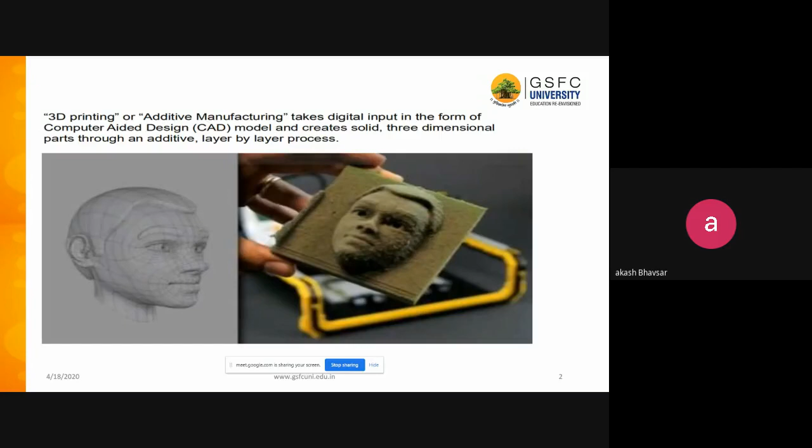So let's go and understand how it works. It's broadly classified into three steps. First is to create a 3D image of any component or item that you want to produce. In computer software, there are CAD softwares available which are very advanced, and they can create very complex shapes with them. So the first thing is to generate the component inside the computer.

Then the CAD information is sent to the printer. After that, the printer forms the item by depositing the material in layers, starting from the bottom layer onto the platform. In some cases, light and lasers are used to harden the material. So from the bottom it starts and goes till the top. There are 3D printers available for different sizes of elements, but broadly this is the process or workflow you need to follow to make a component using 3D printing.

Now let's go into a brief history. Charles Hull invented 3D printing, and he coined the term stereolithography at that time. At that point, the word '3D printing' was not popular, but he started it. Then in 1992, the first 3D printer was built by a company named 3D Systems.

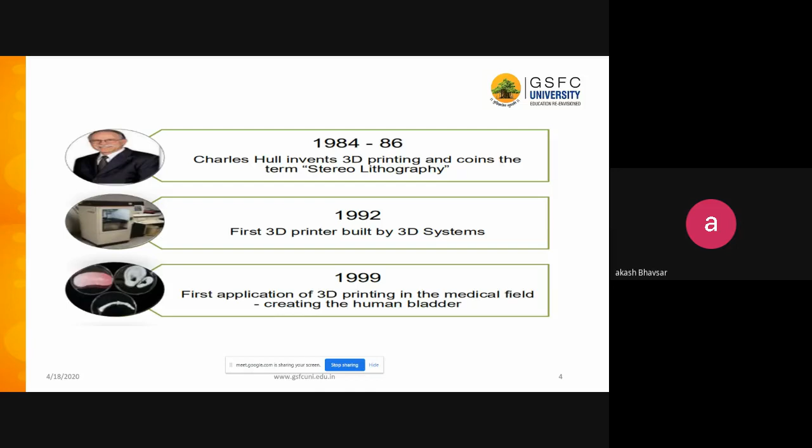Then in 1999, the first application of 3D printing in the medical field, creating a human bladder, right? So these are some of the points or milestones in the 3D printing technology, and how it got advanced at particular stages. And we will also discuss how it will evolve in future.

So in 2000, a human kidney was created through 3D printing. In 2006, printing of multiple materials got started, right? Then in 2009, a prosthetic leg was created, and in 2011 it started making jewelry, right? So these are some of the milestones in different industries in utilization of 3D printers.

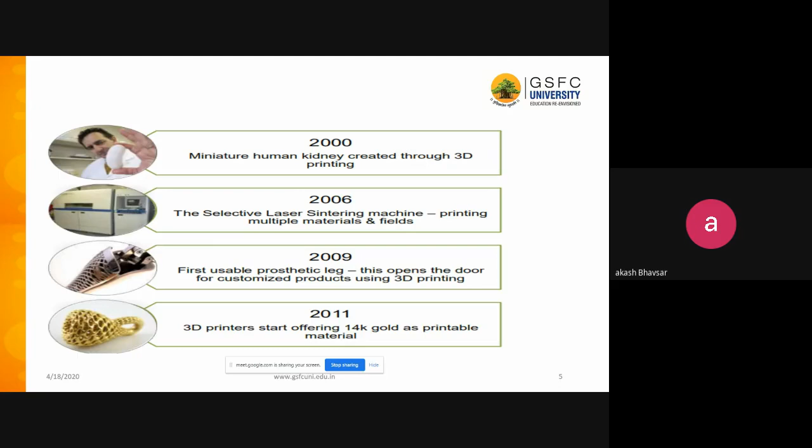So in past few years, how it has progressed, and in the upcoming 7 years, it is projected to grow by 300%. Right. So we have a source which has predicted that it will grow multiple times. The 3D printing industry has a good future in pretty much every field which we can think of.

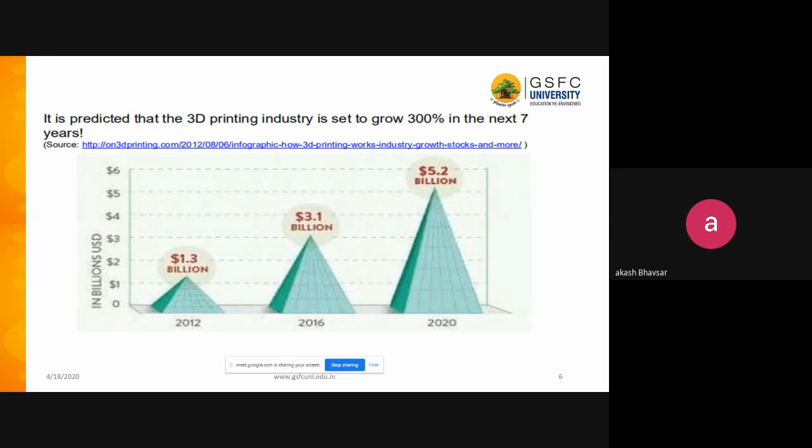Right. Let's go further. So who should learn about 3D printing? The one who wants to help someone to make his dream come true, right? So this includes pretty much everything, right? I mean, you can think about what a person thinks, or what should be there in someone's dream.

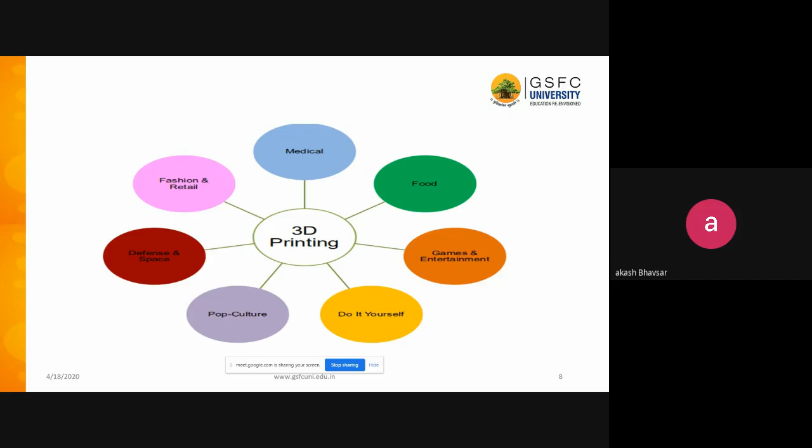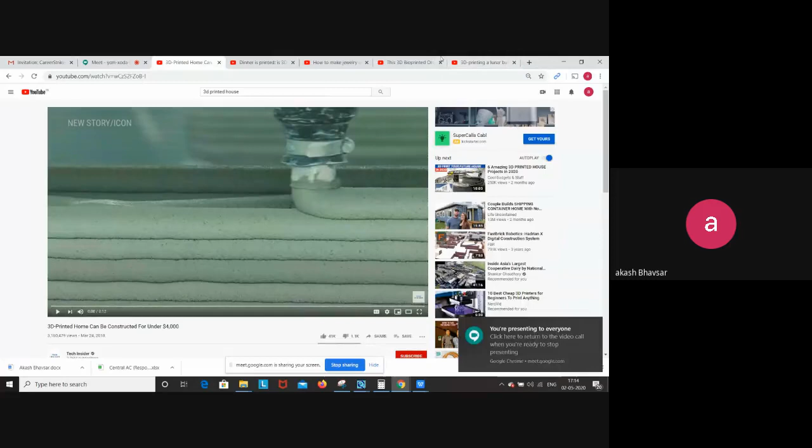So let's think about a family, a new family who is looking for a house. So we can help them by 3D printing a house. I'll share a small video, right, so that we can see the entire process how it comes through. Let me share that.

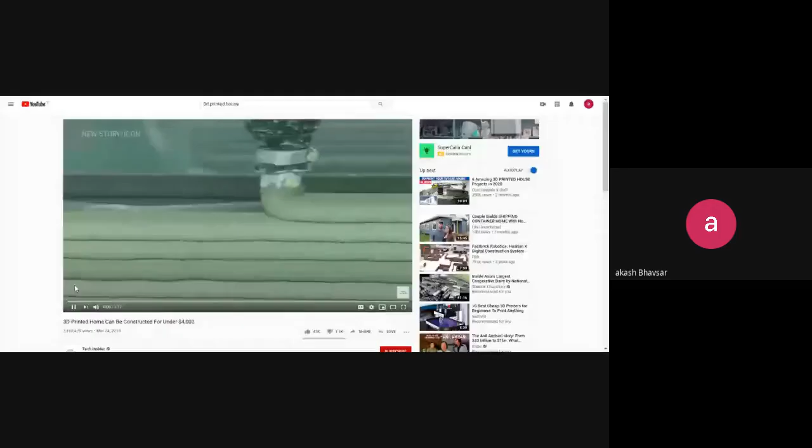So here you can see how a house is built with a very reasonable amount and sufficient for a small family.

So having strong, sturdy walls, having a door that we can close at night, it's something that we take for granted, being able to lock our door and be safe. For many of these families, for years, sometimes even a lifetime, they don't have that opportunity to have a safe shelter. So when they move into a New Story community, when they move into a safe home, families' lives are transformed.

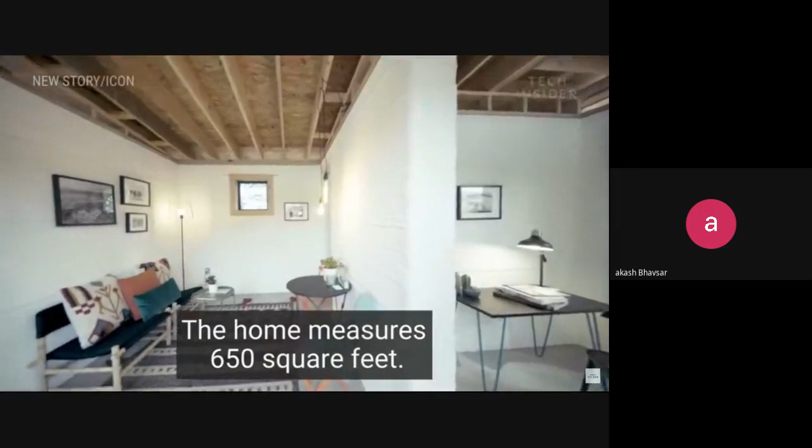So we can see just windows and doors have been installed by human workers. Otherwise, everything else has been made by 3D printer.

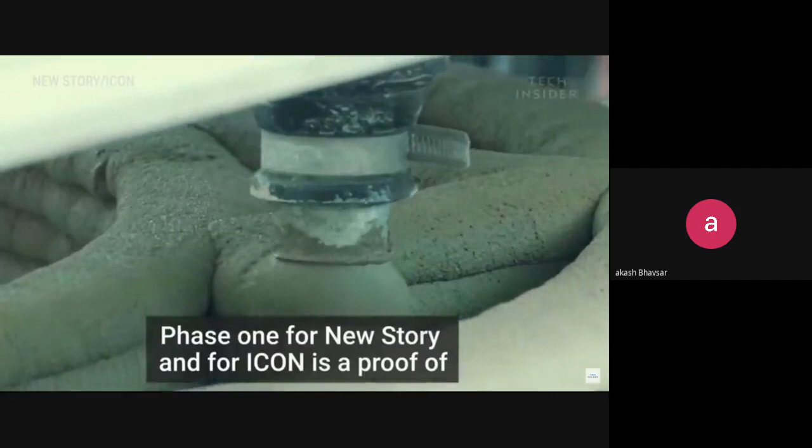Our first product is a 3D printer that can print a house in 24 hours for half the cost. Phase 1 for New Story and for ICON is a proof of concept house, and the good news is we've done it. We printed the first home in the United States that's going to be permitted. And for us, this is just the beginning. The real kind of home run for us is to be able to do what we've done here in Austin, Texas, in the developing world. And we're doing that in what we call Phase 2, which is in El Salvador. We are going to be printing an entire village for people that don't have homes.

So, someone says that I have a house, but if he loves food, he can dream of having a nice dinner. So, let's see if we can get a dinner out of 3D printing.

I'm traveling to Eindhoven in Holland. I want to find out more about 3D printed food, recycling some of the 1.3 billion tons of food that gets wasted worldwide every year. So in Europe, the average is about 20% food waste, and then worldwide it's 1/3. Here, they blend food waste together with seasonings for taste and turn it into a paste, which is then used to print the food. We can use this technology to create attractive food that really gains value and people are willing to eat it again. After printing, the food is baked and dried, giving it a second life.

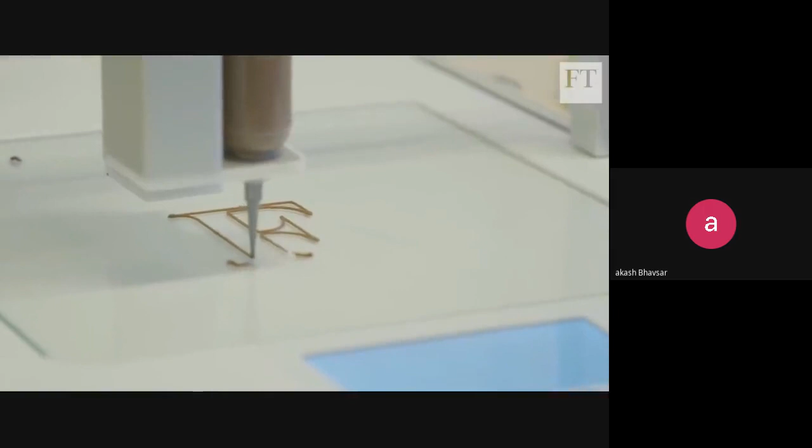Currently it's not quick enough for mass production, but that might be a possibility, but we're first focusing on the restaurants. Restaurants, along with bakeries and caterers, are also a key client of nearby company Byflow. It sells its 3D printer worldwide at a cost of €3,900. Hi, I'm Patrick. Hi, how are you? For now, it's really like beautiful food. It's food that cannot be made by mold or by hand, for example. But developments are ongoing. Experts predict the 3D food printing market will be worth over $500 million by 2023.

I don't believe it's going to stay these small printers. We're already looking into ways, for example, to make food based on your DNA. We should be able in the future to make food that is good for your body, different than for your neighbor or for your children or for your husband or wife. And this ganache is for me. Oh my, it's very good.

I feel sort of bad destroying the FT like this. Beyond beautiful food, 3D printers' ability to improve the appearance and edibility of healthy foods could also enhance the diets of the young, the obese, or the elderly. In Sweden, for example, 3D printed food will be trialed, but I'd like to see some 3D printed food at an

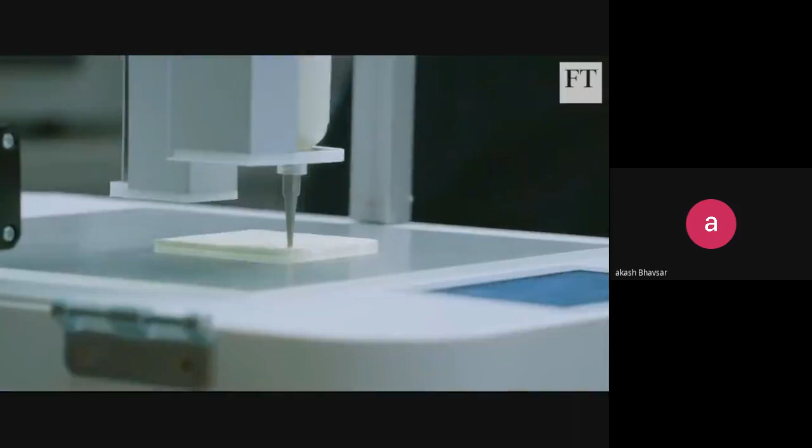actual restaurant. Jasper Kortschmidt is head chef at The Lounge. We use it up from the butter and the bread to the starters, to the main courses and the desserts. We want it as an additive to our dishes, just the extra, the surprise element in our creations that we make every day. This cream cheese will take 5 minutes to create. You can just see all the different layers, so it's like a bit of a maze.

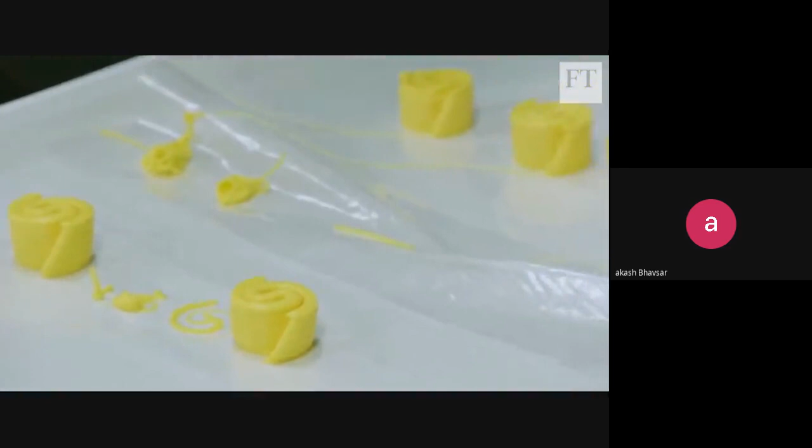Yeah. But it's early days for 3D printed food, so it's still very much about embellishments and marketing. Something you can show your restaurant with, you make an advertisement with, people want to come, want to see, are curious in what it is. Thank you. You're welcome. Right now, it's hard to say whether it will scale up, but it is going to be an industry worth keeping an eye on over the next 5 to 10 years. It's very good.

So now, if somebody says that I don't like food that much, then probably she is a girl, then she must like jewelries. So let's see if 3D printer can help us to generate some jewelries.

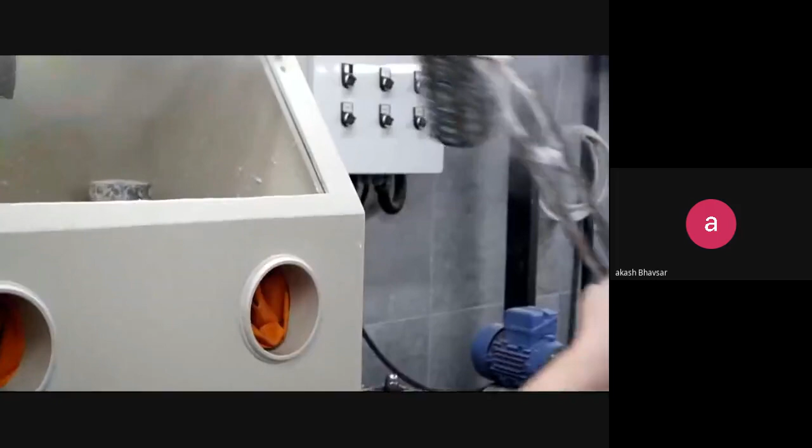Can see some of the beautiful jewelries are made.

Okay, so looks good, right? It can do pretty much most of the things which need to be done. So that's great. Now let's get back to the session. I hope you got some idea of what the applications are; we'll discuss more. So yes.

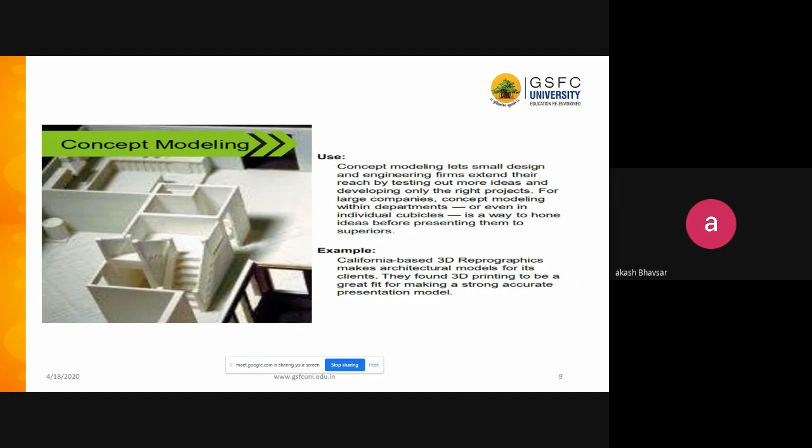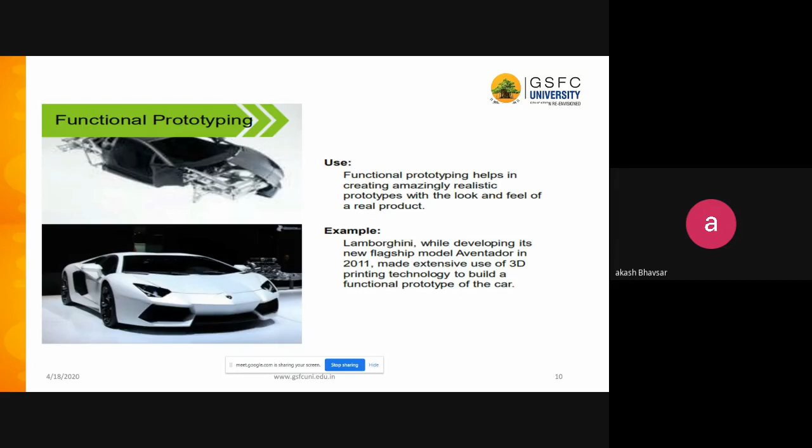Next example is manufacturing tools. So, I mean, there are thousands of examples which can be given for manufacturing tools, because nowadays customization is very much required in most applications, right? Particularly when a machine is designed for some application, and you are trying to use it at a different location or for a different application, it requires massive customization, and 3D printing is the most efficient and fast way to do it, right? So quick low volume tooling and custom fixtures can be provided using this technology, right? Particularly when you are providing fixtures.

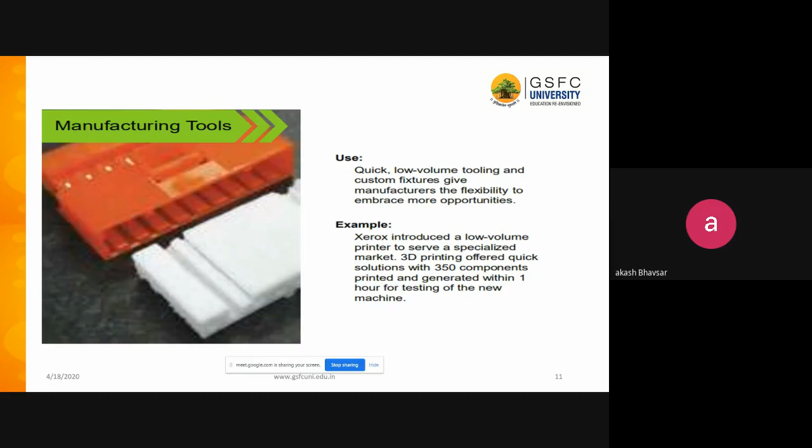So for non-technical people, fixtures are the things which are used to hold your element for some sort of process. When you are processing some method on a particular element, it has to hold well, and to be able to hold that component well, that particular fixture needs to be customized to the size of the element, and it requires a lot of different fixtures, and those fixtures can be easily made using this 3D printing technology. It is widely used nowadays and has more prospects for it.

Then end use parts. So end use parts means the parts which are used by the customer, right? So those things usually require good aesthetics, right?

When you are giving something to a customer, the first thing he judges the product by is its aesthetics, and you have to ensure that you provide it very nicely, right? So it is capable of durable, stable and repeatable parts in the industry. Kelly Manufacturing Company, in aviation, has used 3D printed components, right?

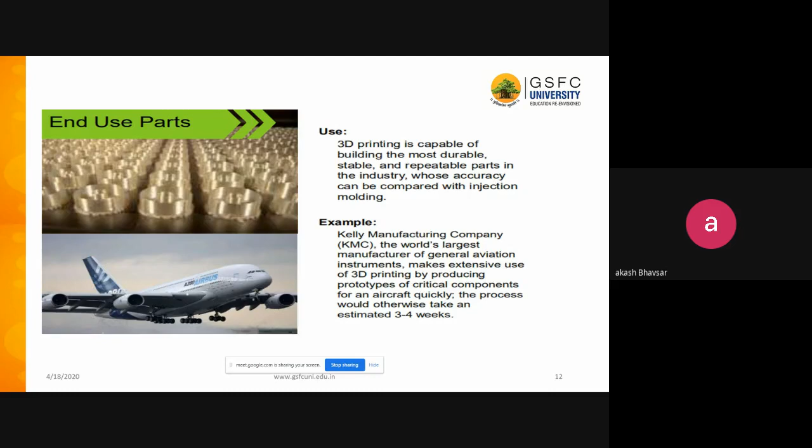Then finishing. It's hard to get this kind of surface finish with surface removing technology, right? We know that this is additive manufacturing, and there is other manufacturing where we remove material. If we remove material to make a component, it is hard to get a good surface finish, and that's why those things need to be polished right after manufacturing. But here you get a very good surface finish, and that's why you can see the aesthetic.

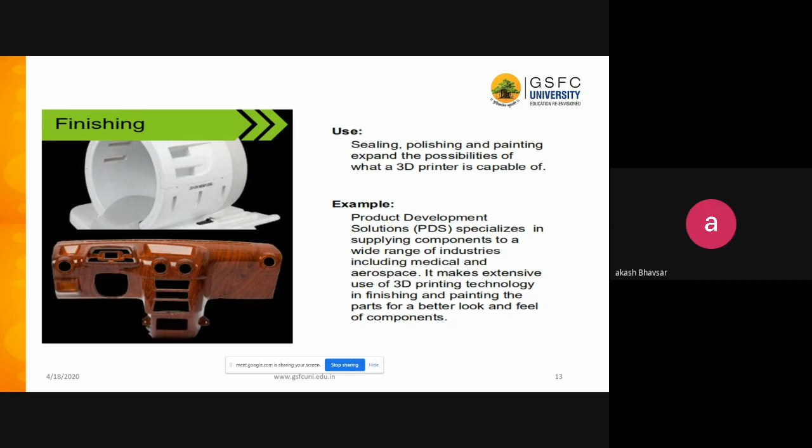The thing you see in the bottom portion is the interior of a car, which looks very good, right? So the interior, which requires good aesthetics, can be manufactured using 3D printing technology, right?

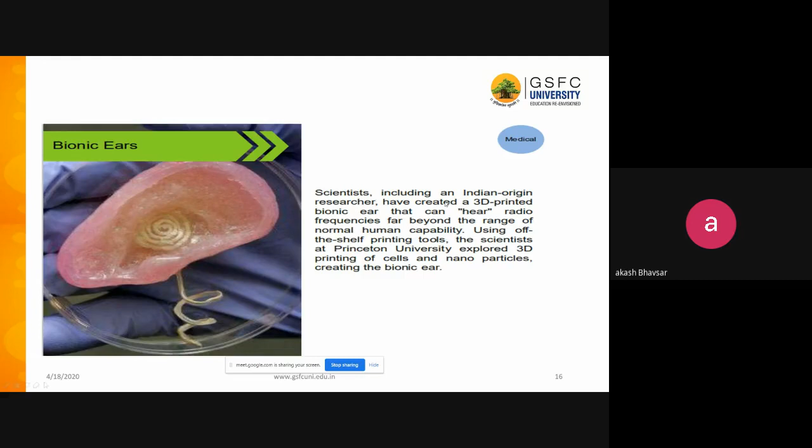To give you more idea about medical applications, I'll also share this 3D printed bionic ear, right? That can hear radio frequencies far beyond the range of normal human capacity, right? So these kinds of creative biological products are also made by scientists at different universities, right? It has been made with nanoparticles and cells, right?

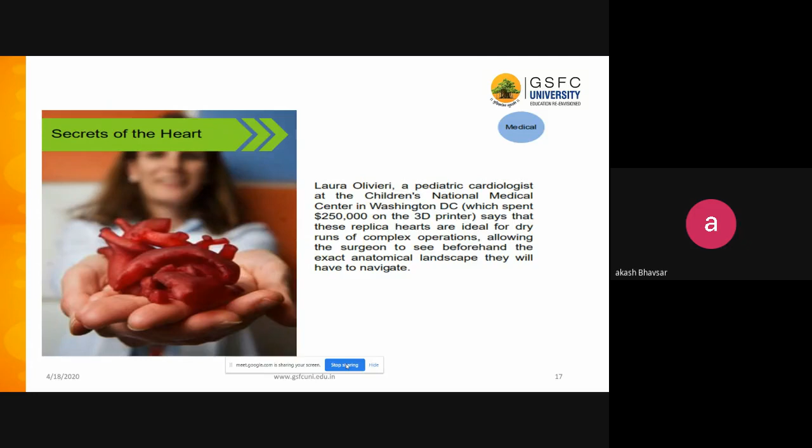So there are efforts being made to make artificial hearts or any artificial organ, right? As we can see over here in Washington DC, they are trying to do it. I'll also try to share with you a similar kind of medical application. So

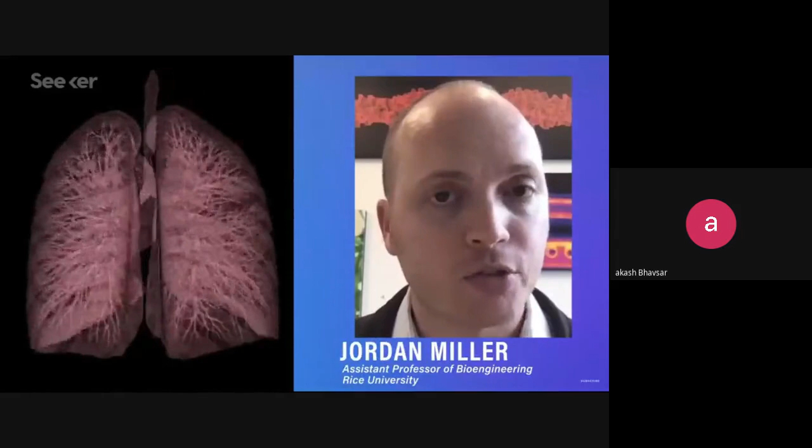Here you will see. Looking at a 3D bioprinted lung mimicking air sac that's able to pump air into airways, mimic blood flow, and was built using living cells. Granted, it's smaller than a penny, but this lung mimicking air sac could bring us one step closer to understanding how we could replicate human organs using patient cells, which could one day help to avoid organ rejection. The team behind this model is trying to replicate the complicated architectural structures of our organs using 3D bioprinting and use the lung as their proof of concept. It is a very complicated structure, yet it has extremely clear readouts for its function.

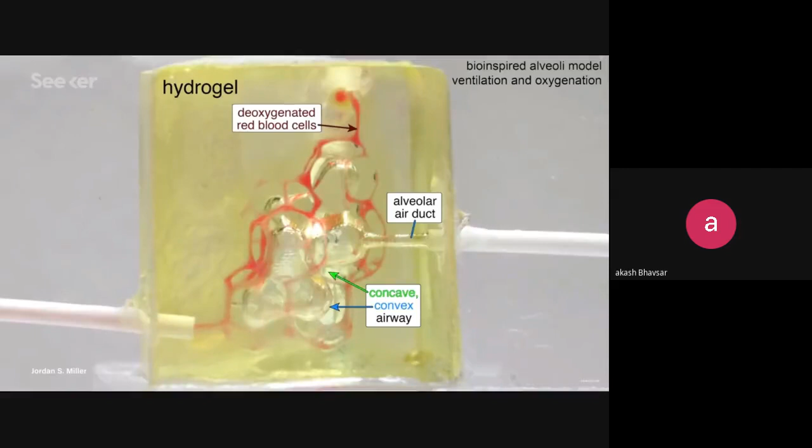So here you can see they are making a lung, an artificial lung. At the time of lockdown, we are hearing a lot more news about coronavirus, and you can see to what extent pneumonia is causing the lung to malfunction.

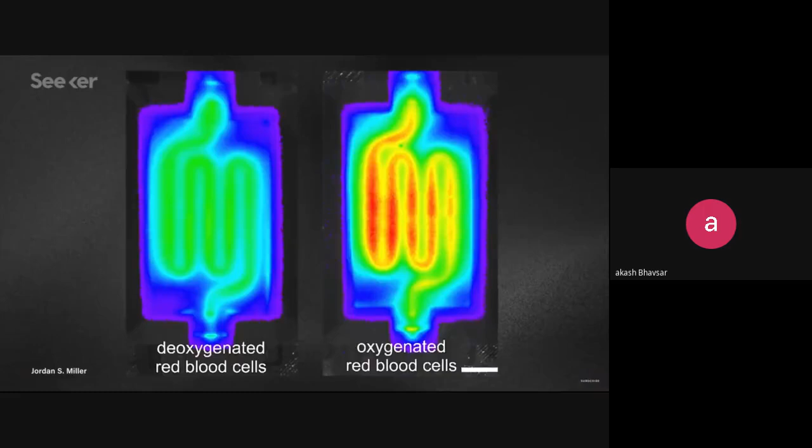Creating vessel architectures has been one of the biggest 3D printing challenges in the world of artificial organs. That's because our organs are, well, pretty complicated. They are physically and biochemically entangled. And they serve crucial purposes by supplying organs with essential nutrients.

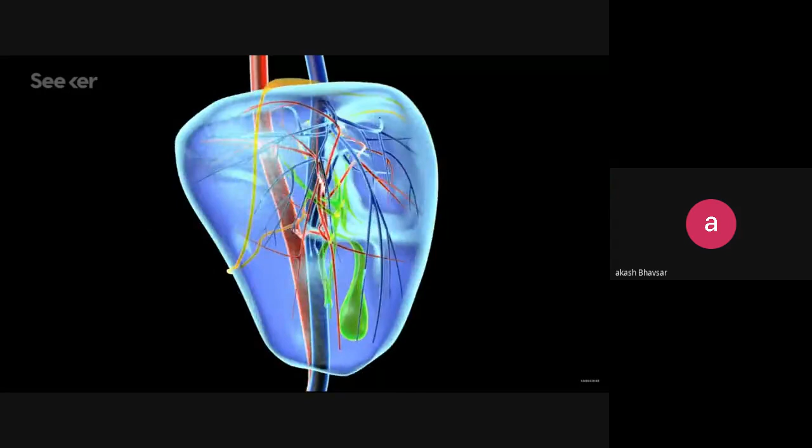Take the liver, for example. It has over 500 functions, like producing bile for digestion and maintaining the right amounts of blood sugar within the body. All these functions depend on the intricate network of vessels to get their necessary nutrients. It's this multivascular architecture that makes mimicking and replicating human organs so difficult. So if we could figure it out, the payoff would be huge. Over 100,000 people are waiting for organs in the US, and bioprinting healthy organs could be a way to address this shortage by supplying replacement organs. It could also reduce the incidence of organ rejection, since bioprinted organs would contain the patient's own cells. But working with living cells is not easy.

Cells are extremely fragile outside of the body, and once extracted, they need to be placed into their final structure as quickly as possible to ensure survival. The cells are then encapsulated within a hydrogel, a water-based material which emulates a cell's environment to allow them to survive longer. So how did Jordan and his team print the lung model?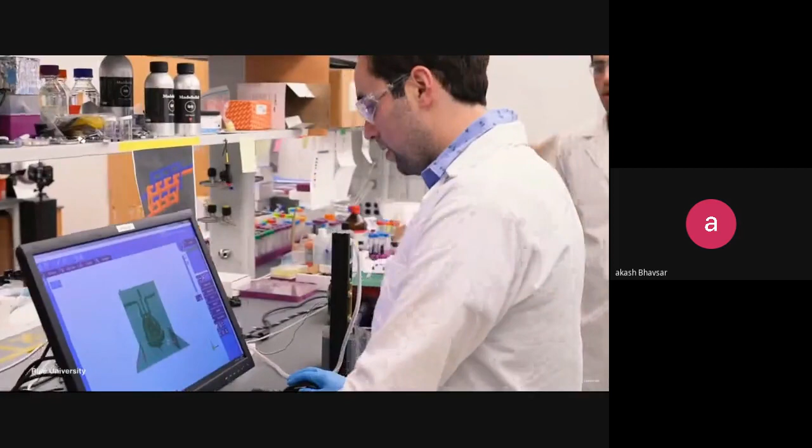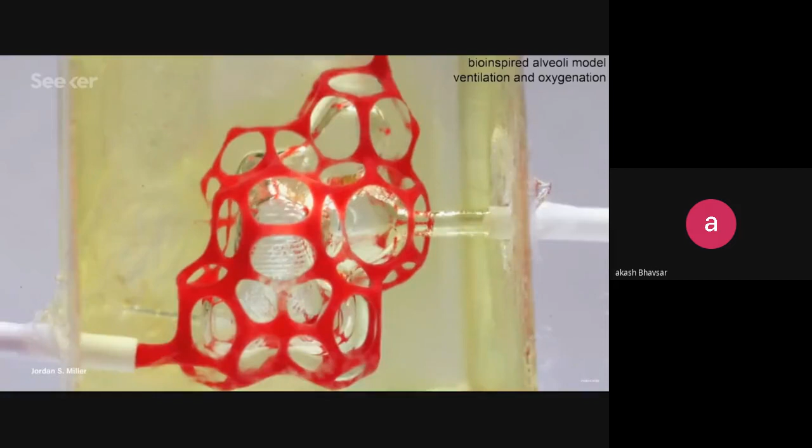They used a technique called stereolithography apparatus for tissue engineering, or SLATE. It's an open source bioprinting technology that uses additive manufacturing to create soft hydrogels layer by layer using light from a digital projector. This is a light-based polymerization system. We have a light-sensitive liquid that when you shine the right color of light at the right intensity of energy, the right number of photons hit the sample, you can convert that liquid into a solid only in that region. But using light also created some issues, since it could get into previously solidified layers, disrupting the intended pattern.

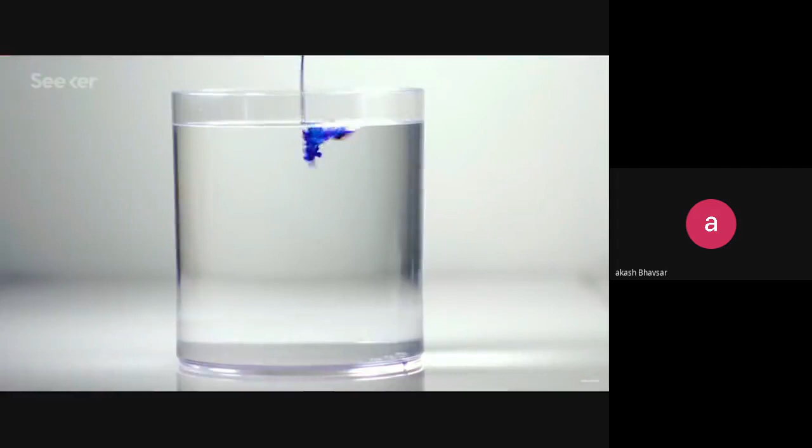To address this, the team searched to find an element that could block light and was biocompatible. The winner was food dye. These biocompatible food additives that all of us are eating all the time anyway—we already know they're biocompatible. They're compatible with live cells, and they can be used as potent photoabsorbers to block light penetrating previous layers, giving us our complex architecture.

The food dyes were able to confine the solidification to a thin layer, creating the desired internal structures. In the end, these tissues proved sturdy enough to withstand blood flow and pulsating breathing, the rhythm that mimics the pressures and frequencies of how we breathe.

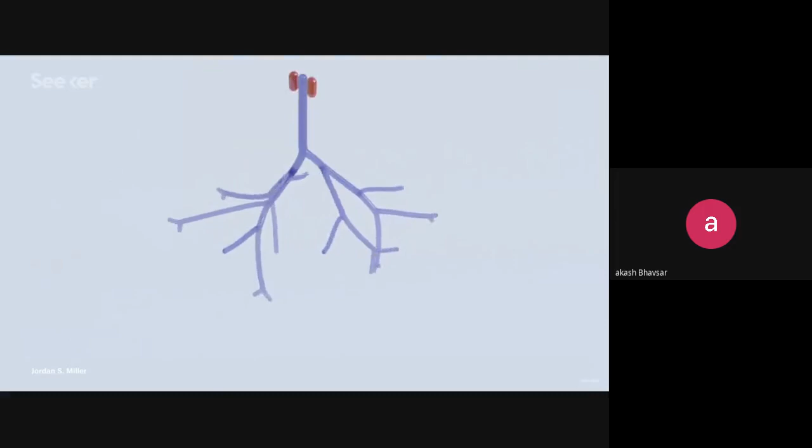So this model may be tiny, but it's just the beginning for Jordan and his team. They plan to make more complex designs and scale them up. And in the spirit of teamwork and advancing research, they've made their work's source data freely available.

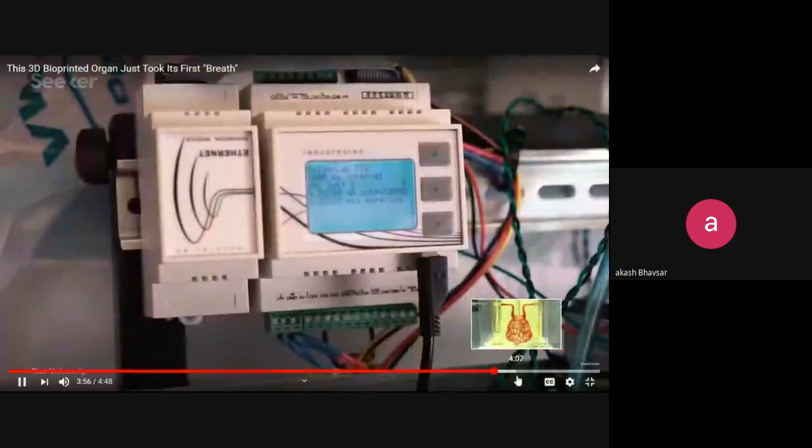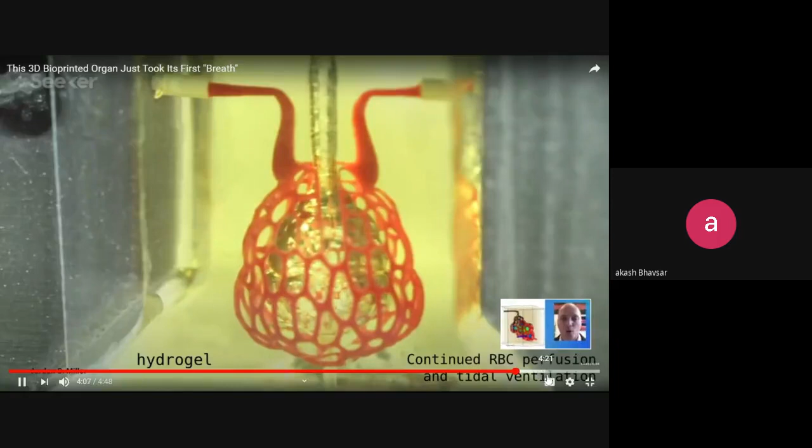We're using open source to be able to make the 3D printer. We're giving back to the open source community our designs. But I think scientists in general get a little bit nervous about releasing things into the open, because they think: why do people really want this, what are people going to use this for? I don't really know. You actually want to open source your stuff because you don't know what people are going to use it for. And that's really the power behind open source, and it's really the power behind science.

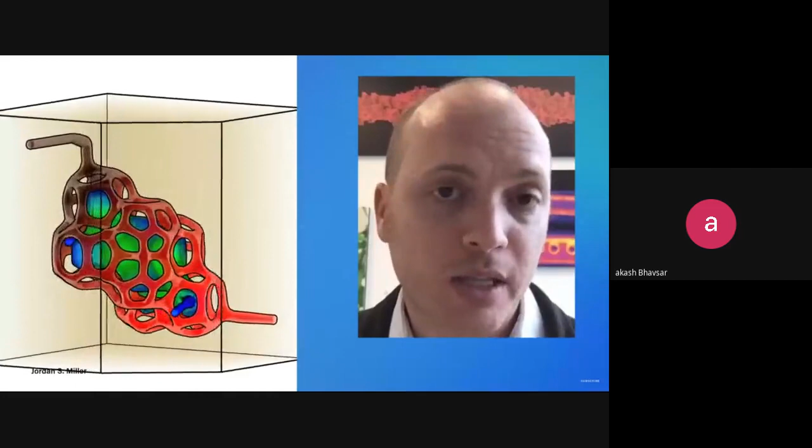And thanks to collaborative efforts like these, we'll one day be able to...

Okay, so we can see a lot of applications in medical, right? Now let's get back to the presentation.

Yeah, organs which we have seen already, right?

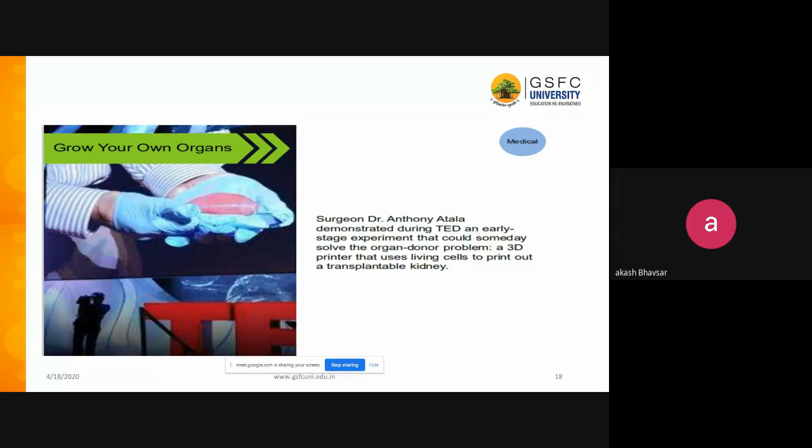Then personalized robots. So nowadays we see a lot of robotics around us, and we would like them customized for our needs, and that can be easily done with 3D printed components. So again, there's a good application in robotics, right?

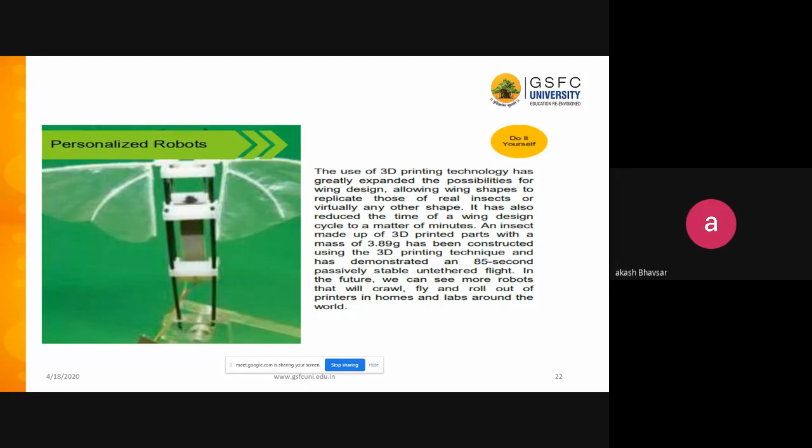Car that builds itself—this is a very unique and new idea, where you have a machine which can build itself and make a car out of it as per your requirement. A customized car, right? So those are some of the concepts currently under development for this 3D printing application.

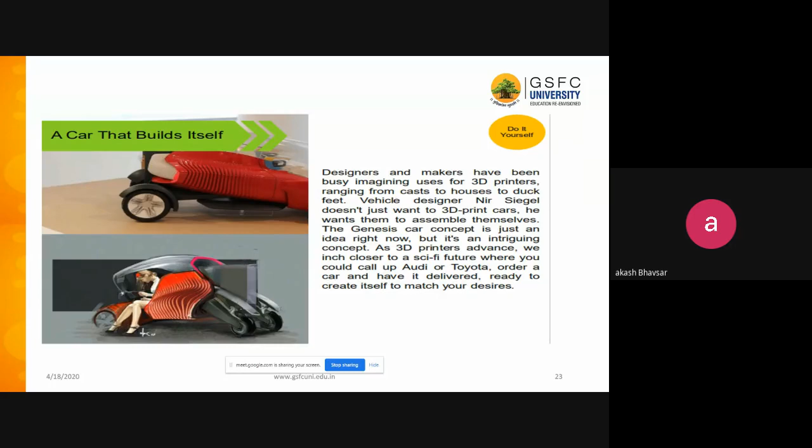Fashion. Nowadays we see different fashions, particularly in clothing. Here are some accessories that can be added to clothing. Besides that, in movies we sometimes see a monster or person with an artificial shape on their hand, we can create that using this. In areas where aesthetic complexity of the shape is required, 3D printers are very useful.

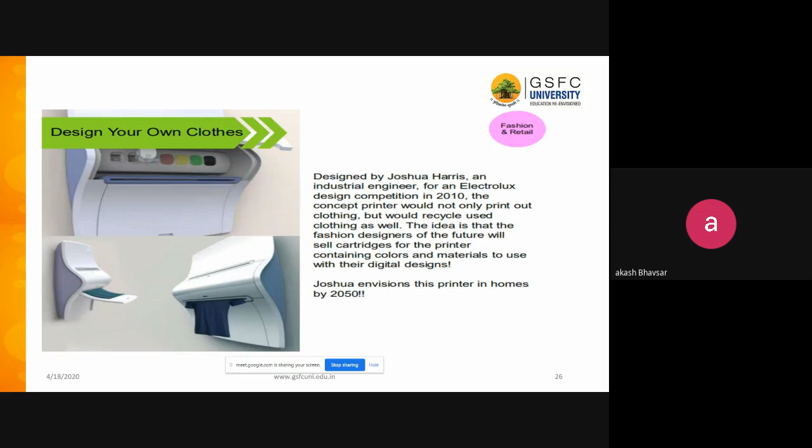Designing your own clothes, right? There are devices for this. People are envisioning that one day the printer will be at home, which can print your own clothes as per your design and color. You can choose the type of cloth you want, and it will provide it. So those kinds of developments are going on using 3D printer technology.

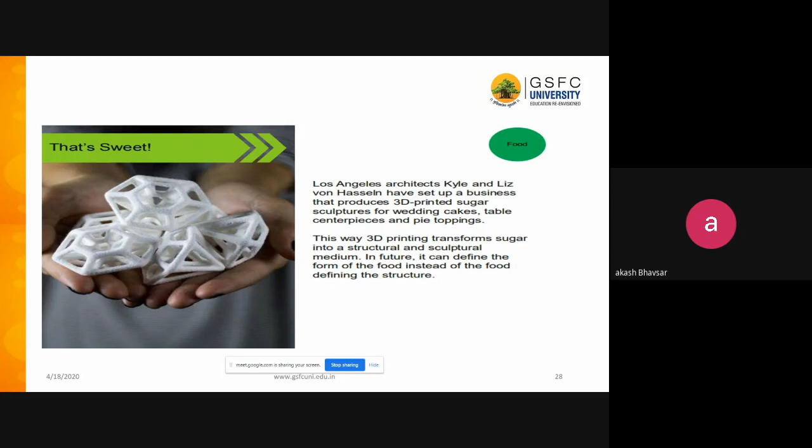Food we have already seen. You can see that a sweet has been made by 3D printers. Chocolates or sweets which are made by 3D printers. So there are so many applications where we can use 3D printing technology.

I can show you one more application, for space. When a human can get to space, or maybe to the moon, how can he use a 3D printer to survive? We can see how we can survive in space, or have a habitat or house in space using 3D printing technology.

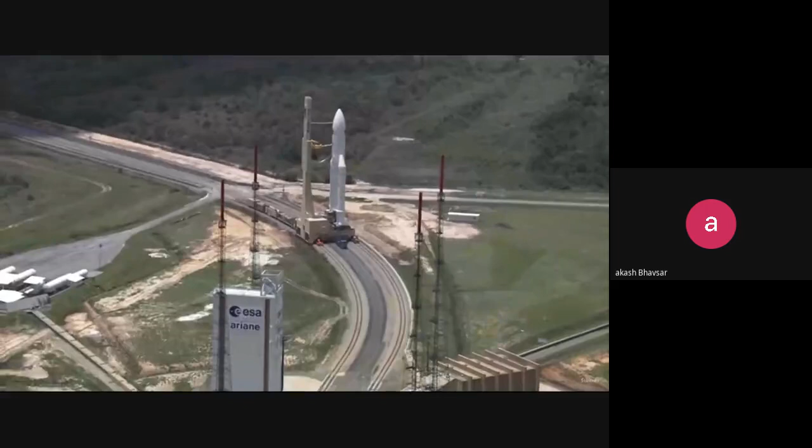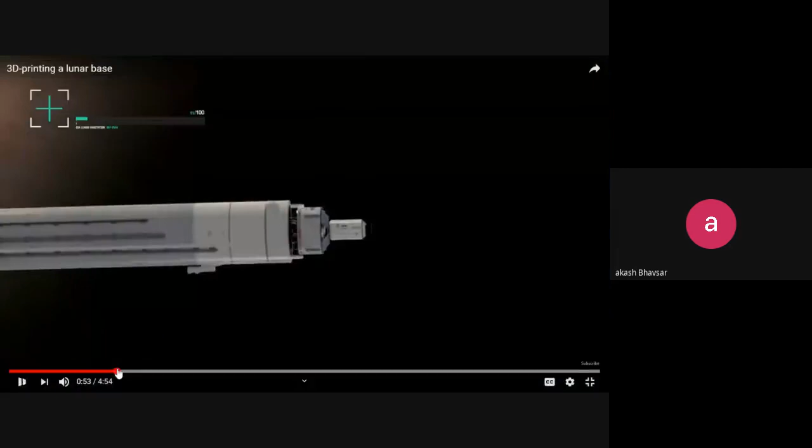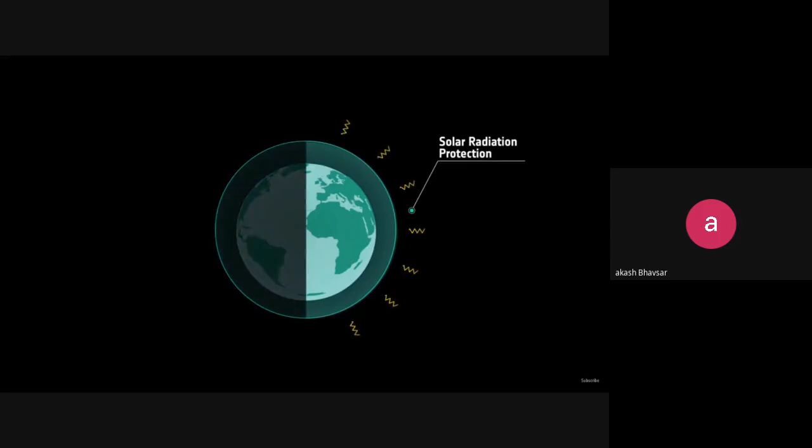Planet Earth is protected by the atmosphere, the layer of air and gas that surrounds it. The atmosphere shields the Earth from solar radiation, keeps the temperature balanced, and protects us from meteoroids.

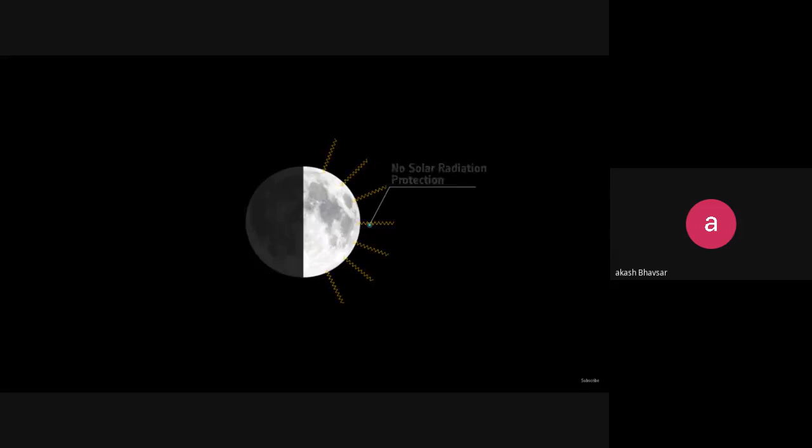On the Moon's south pole, you can see almost perpetual sunlight on the horizon. This is the site of our lunar base. Conditions on the Moon are very different from those on Earth. Because the Moon has no atmosphere, there is no protection from solar radiation, there are extreme temperature fluctuations, no protection from gamma radiation, and no protection from meteoroids.

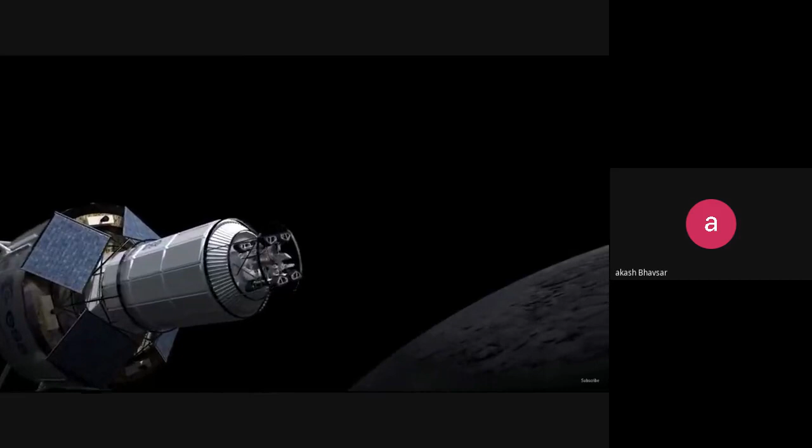The lunar lander has detached from the rocket launcher and is on a course to Shackleton's crater, the Moon's south pole. Inside the lander is a cylinder which contains an inflatable dome and 2 robot 3D printers.

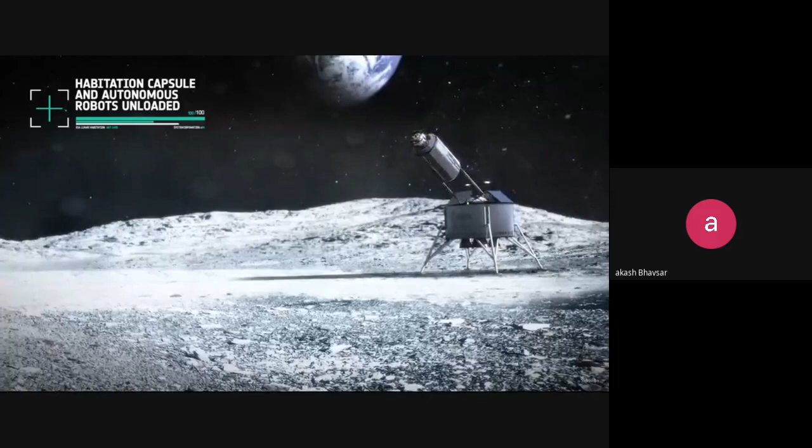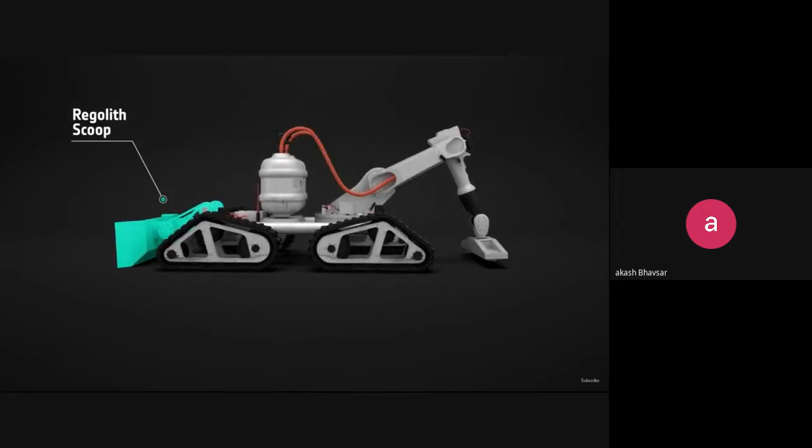After the cylinder containing the habitation capsule has been unloaded, a dome is inflated from one end. This provides the support structure for construction, a little like scaffolding used to build on Earth. The lunar habitation is built by a robot-operated 3D printer. At one end it has a scoop to collect the regolith. In the centre are containers for the printing material. At the other end there is a robotic arm with a printing head.

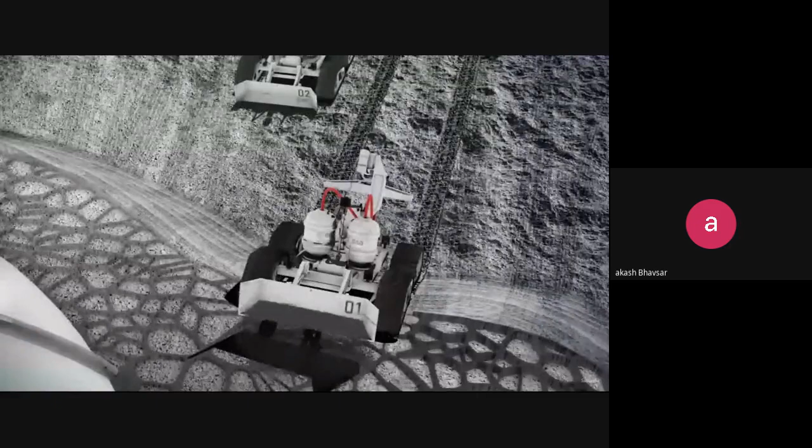The robot collects regolith from the Moon's surface. Layers of this moon dust are built up over the dome to create the protective shell. This process takes about 3 Earth months. The shell is made up of a hollow, closed cellular structure. Under a microscope, it would look very similar to the close-up of a bird's bone. Like a bone, it is light and incredibly strong at the same time.

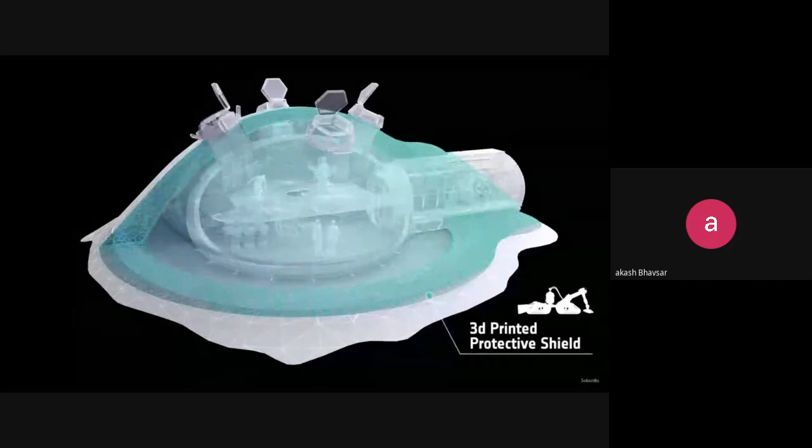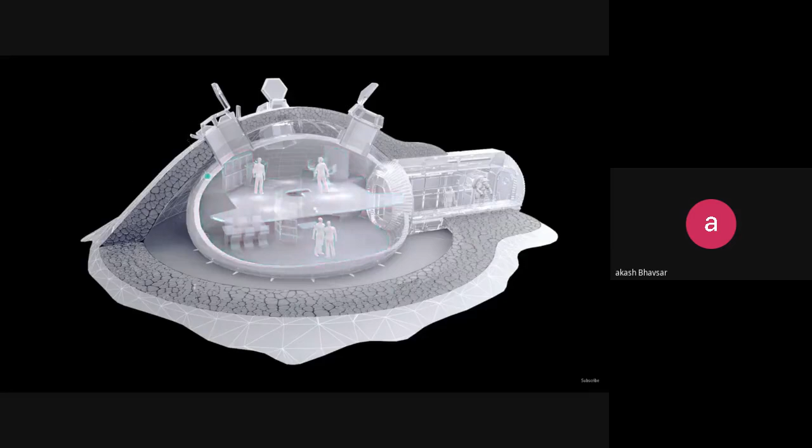When the lunar base is complete, it can house 4 people. Inside the dome, they are protected from meteorites, gamma radiation, and high temperature fluctuations. The original capsule functions as an airlock and technical support module. The skylights draw daylight into the living and workspaces, which are sheltered within a pressurized enclosure. This method is a pioneering advance in space-age construction.

At Foster & Partners, we're used to designing for some of the world's most extreme climates. We often use materials found locally to create sustainable buildings on Earth. While the Moon is an exciting new territory for architecture, the value of this logic endures.

So this was one more application for 3D printer. Now we'll go to briefly how it actually works. We'll see some technical things. First, we'll start with some terminologies related to it, then go through briefly, and then discuss question answers. So there are some terminologies which may help you learn about it.

This refers to technology that creates objects through sequential layering - additive manufacturing, as we know. It creates objects through sequential layering. So basically, layers are made in regular sequence to ensure that material is added, and that's how it is made.

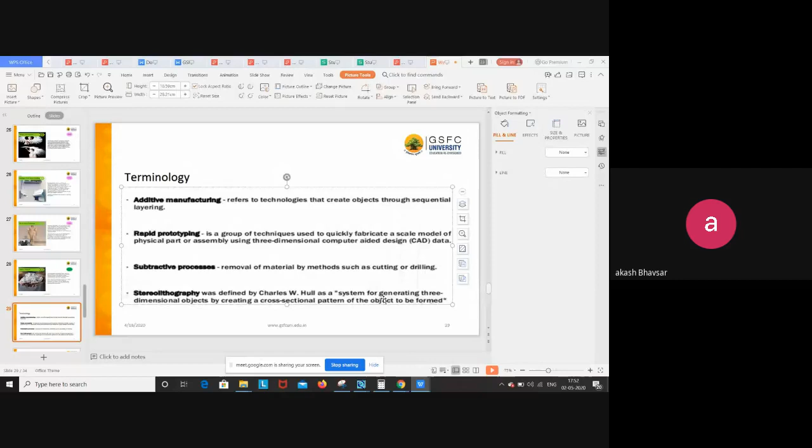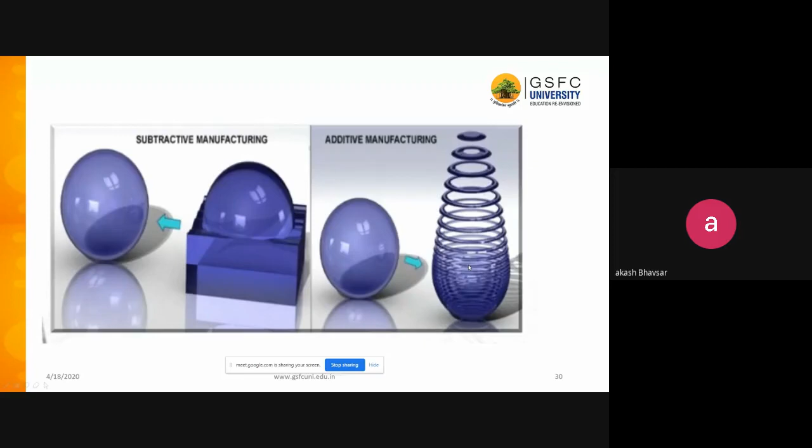Let's go to the next slide. So here we can see in subtractive manufacturing, things are removed out of a square - you are making a round shape. While in additive, layer by layer, things are added. This makes you understand additive manufacturing. Rapid prototyping is like putting layers at one go. This is an example of this - it has a particular scanning direction, and in vertical and cross-sectional axis it puts layers.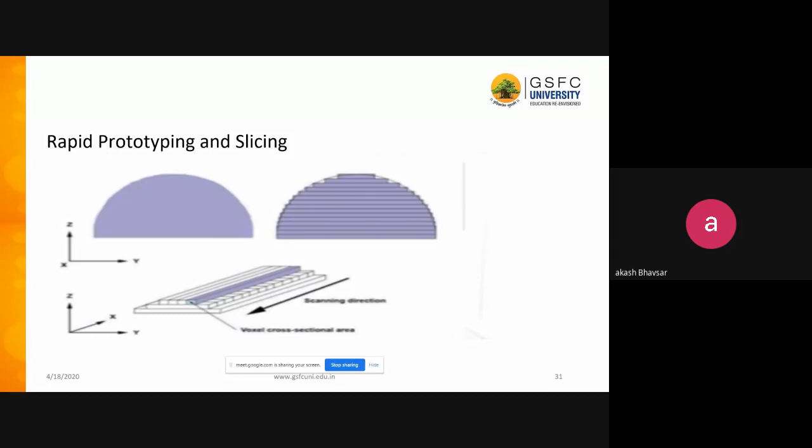Printing: the machine basically reads the file which is imported from computer software, and that imported file has been read, and as per the requirement of that component, the 3D printer moves its parts and makes a component out of it. There are different technologies which we may see.

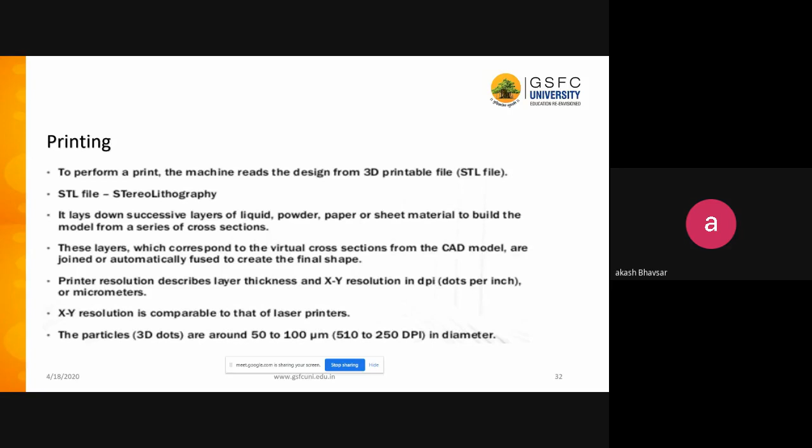Basically, we may refer to the list - it takes a long time to go into detail of each technology, but we'll see what the technologies are. Additive processes are basically of five different types. First is extrusion deposition - material is extruded and deposited on that particular stand to make layers. And granule material binding - in this second method, granules are binded to add material.

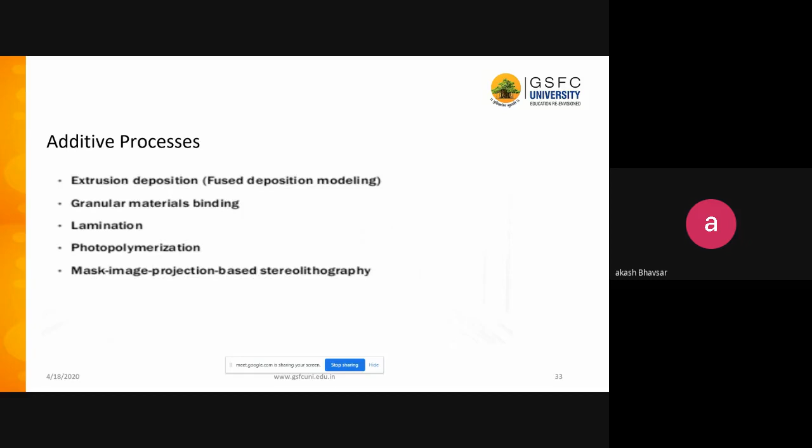And there are some other processes which require longer discussion - maybe we can discuss it on some later opportunity. So I guess we are about to finish the session. Are there any questions?